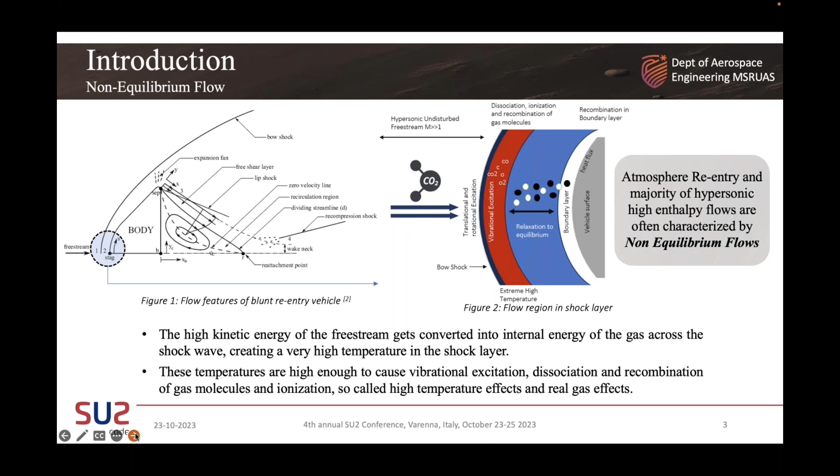At this condition, where we observe complex vibrational and chemical kinetics at the local region of the vehicle surface, one of the hardest parts is to accurately predict the surface parameters, specifically to compute the heat flux data across the surface of the body, since it plays

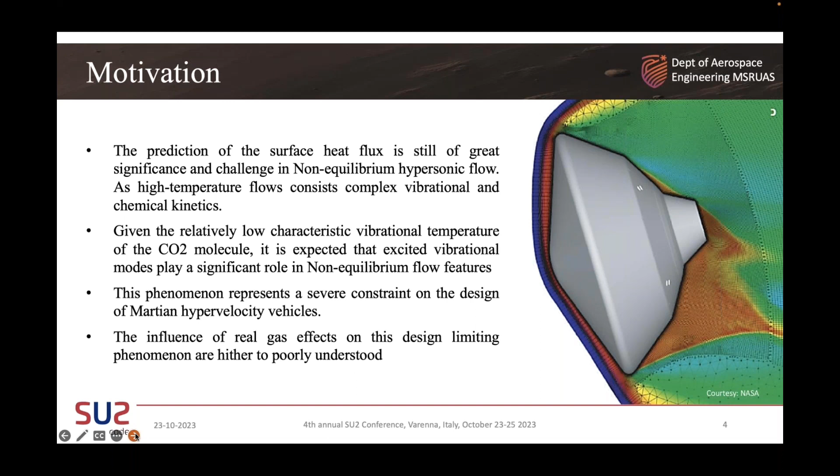a very important role in the design characteristics of Martian hypervelocity vehicles. On top of that, given that the low characteristic vibrational temperature of the CO2 molecule is expected to play a significant role in non-equilibrium flow features, the main aim and objectives of the current work are to model the aerothermodynamic environment and study the non-equilibrium effect on heat flux in CO2 dominated flows, to carry out validation of SU2-NEMO modeling capabilities for high enthalpy reacting flows against experimental data, to assess the augmentation of heat flux due to different thermochemical modeling assumptions, and finally to compare results from SU2-NEMO and the Fluent solver.

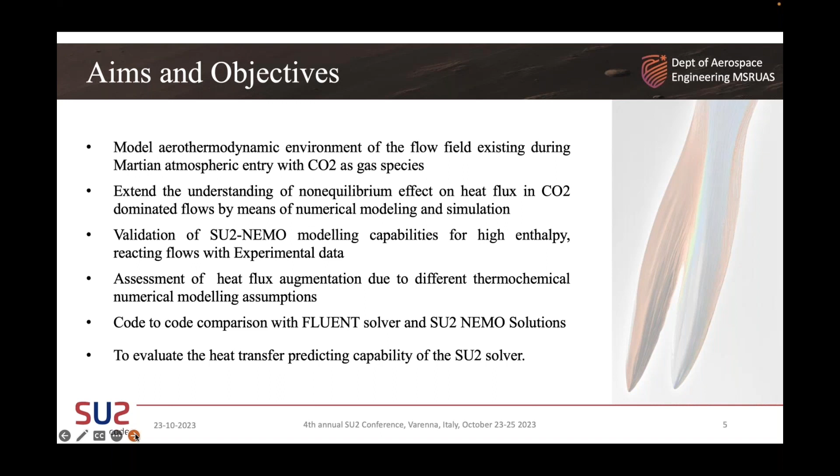For this current study, we have taken two different geometries of large angle blunt cone bodies: one having a 120 degree apex angle, another with a 60 degree apex angle blunt cone. These geometries are basically used as a forebody configuration for hypersonic re-entry vehicles. The 120 degree apex angle has a base radius of 50 mm and nose radius of 25 mm. The 60 degree apex angle has a base radius of 40 mm and nose radius of 35 mm.

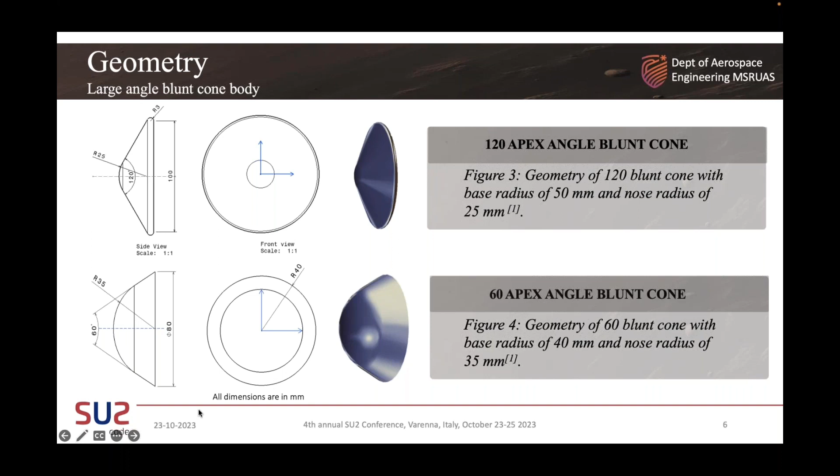These are the free stream conditions taken from the experimental paper carried out by Professor Mohammad Ibrahim, who is now working in IIT Kanpur. He carried out experiments in high enthalpy and low enthalpy flows using FPST, a free piston shock tunnel, in IISc. In this case, I have taken a high enthalpy case where the enthalpy is 3.6 megajoule with a Mach number of 5.87, pressure having 572 Pascal with the temperature 739.85.

The test gas used here is pure CO2 gases, and the table above shows the gas properties that were present in the nozzle supply region. These were the total pressures that were present in the nozzle supply region.

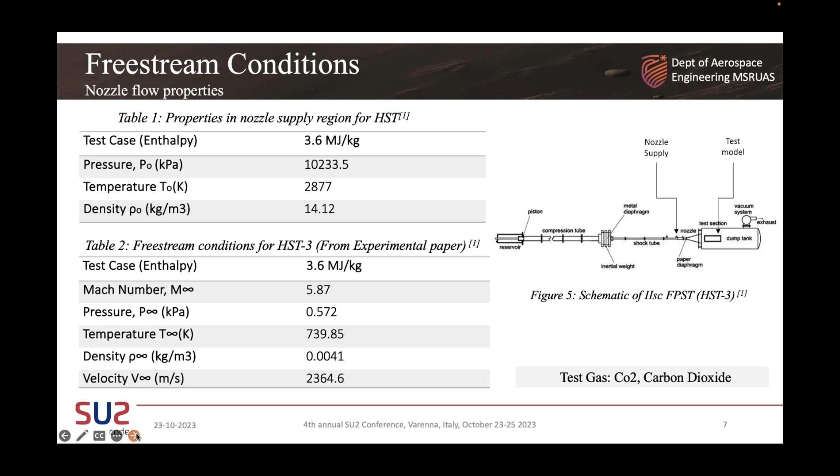Here we have the species mole fraction of different CO2 species that was predicted in the nozzle supply region using Chemkin software in the experimental data. All the reactions described here were taken out from the experimental paper, which was calculated by Chemkin software in the experiment.

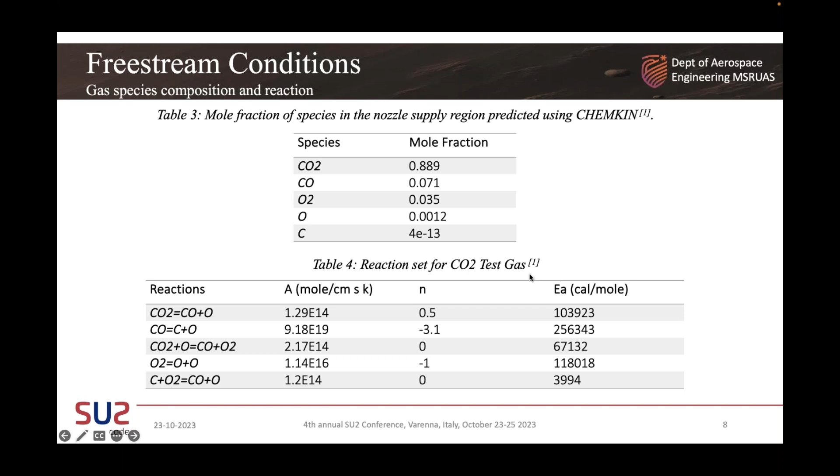Here is the whole implementation and workflow of how the solver works. The coupled system of SU2-NEMO and Mutation++, which is a thermochemical library, helps in computation of thermochemical and transport properties of the gas mixture.

Since we have a different chemical mixture and different reactions occurring, we have created a mixture file and reactions file. In the mixture file we add composition and species present in the free stream condition, and the reaction file contains all the reactions taking place between the molecules that are present.

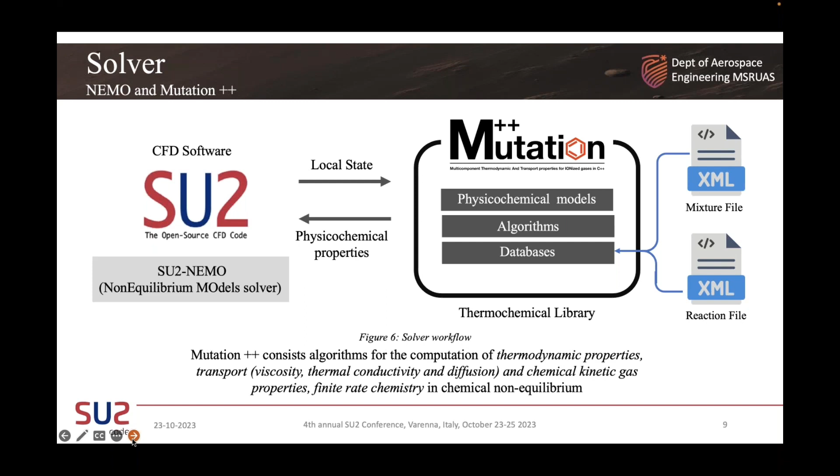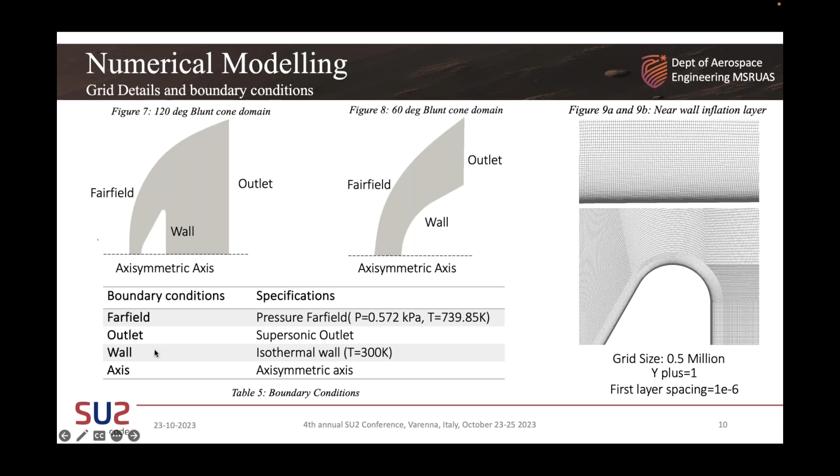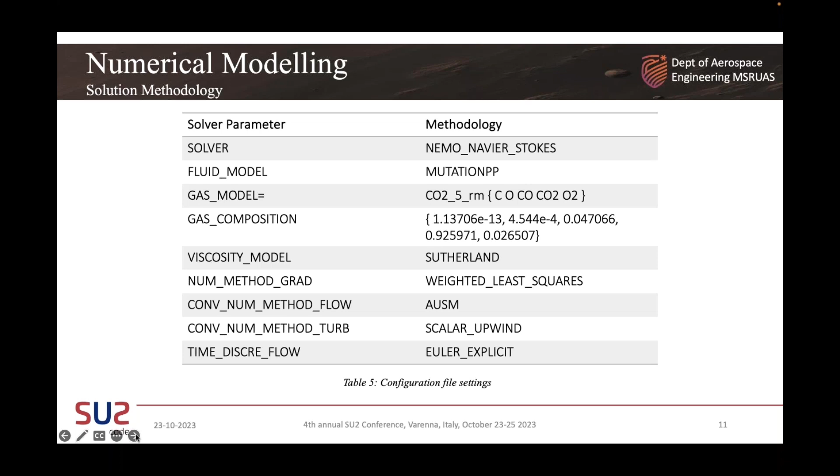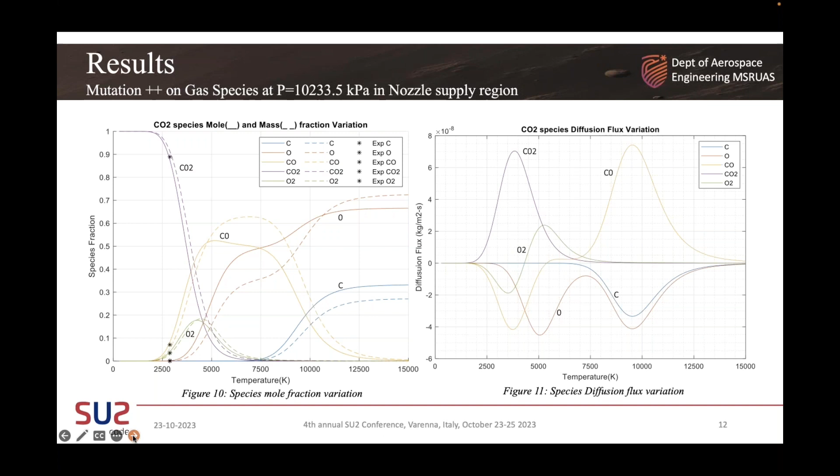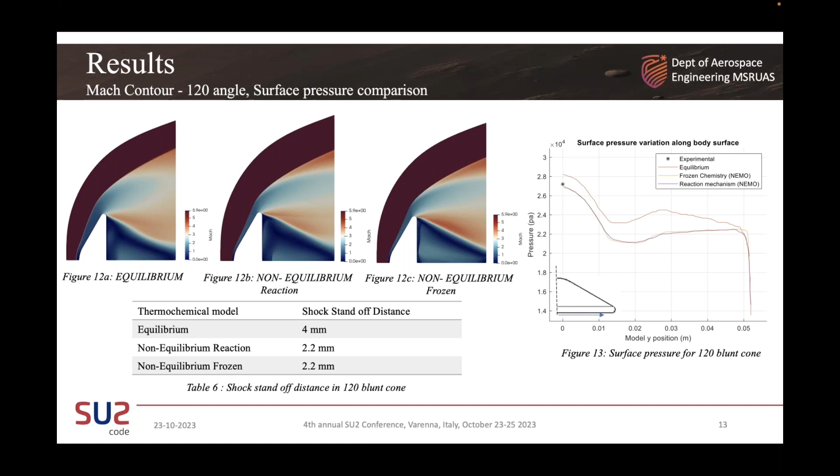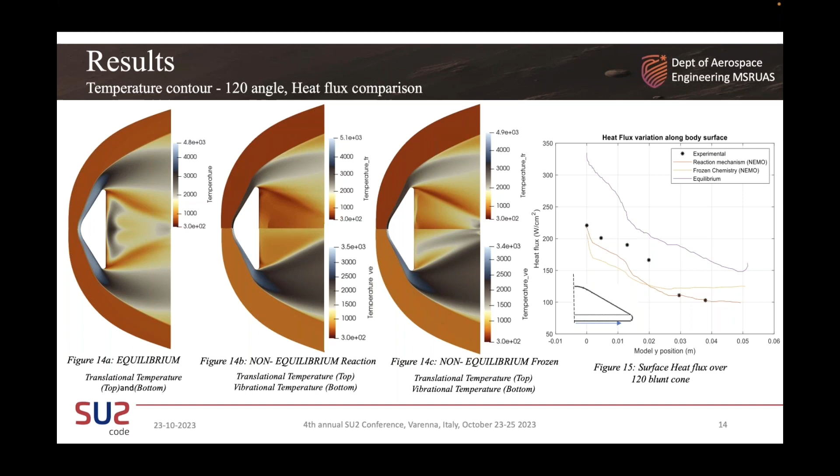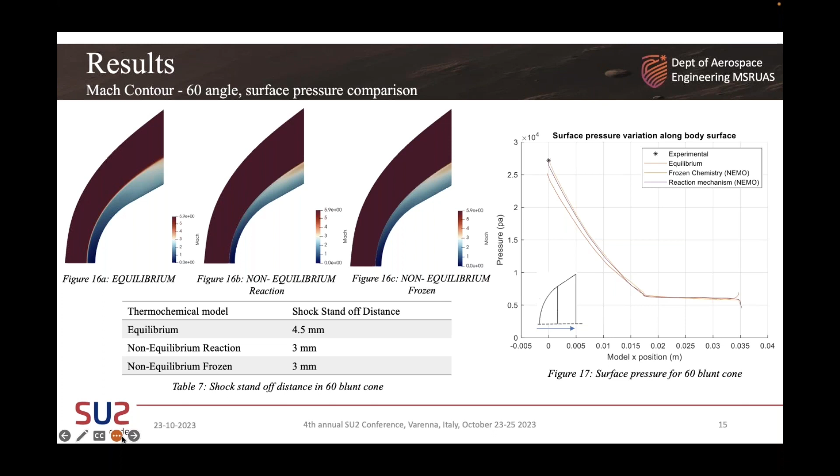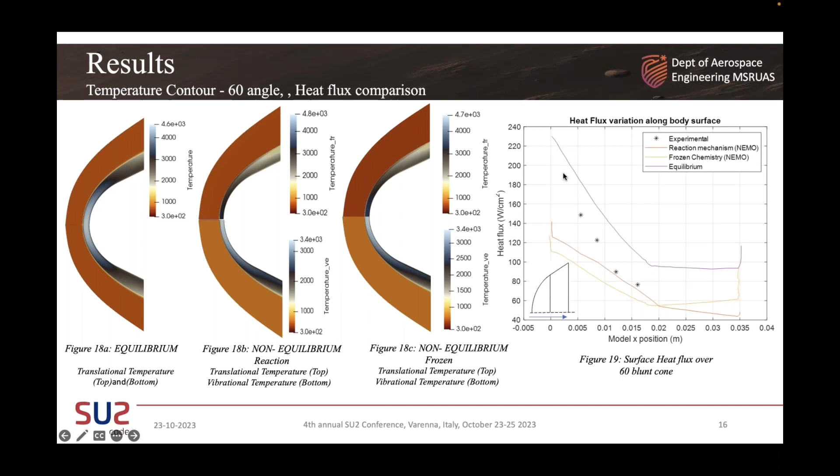So these are the same temperature contours, the vibration and translation rotation temperature contours for a 60-degree blunt cone. Again, in the 60-degree blunt cone, much deviation was found in the heat transfer near the stagnation region, but in the aft region the numerical results and the experimental data matched pretty well. It's not accurately matched, but it's closer to the experimental data, and obviously in the equilibrium case a higher error was found along the body surface.

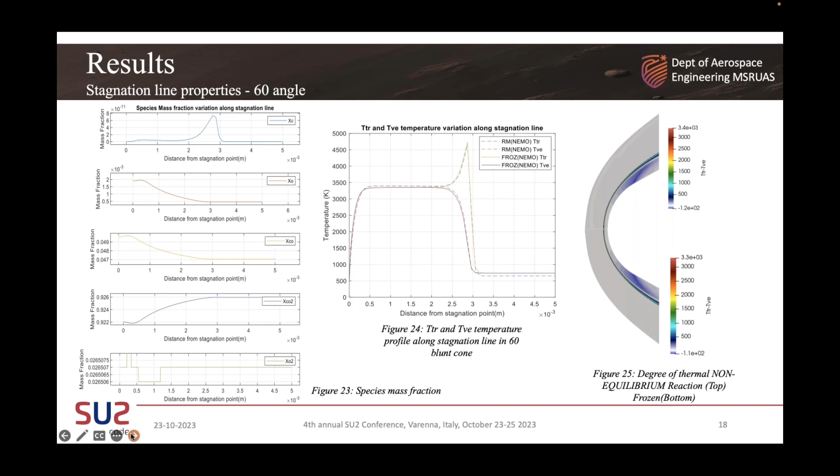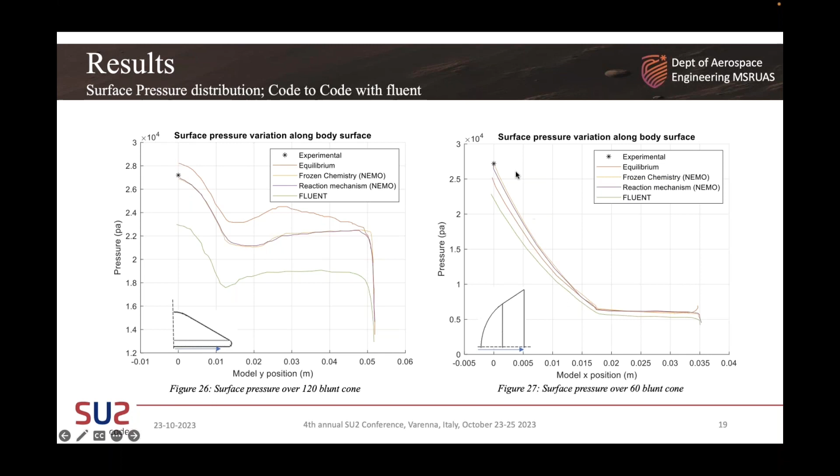So finally, we have carried out a code-to-code comparison with the Fluent data. Fluent data eventually under-predicted the surface pressure as well. But in the case of 60 degrees, all the pressure data for every different chemical model give similar results, except at the strongest region near the stagnation region.

So these are the heat flux comparisons, which were compared with Fluent. Fluent also provided almost constant heat flux near the nose region, and even the stagnation region for the 60-degree blunt cone was also over-predicted in this case.

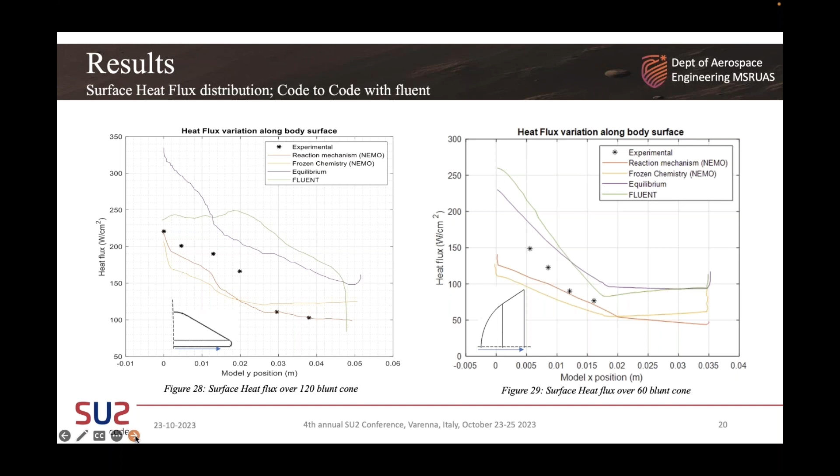So with the data we obtained using the simulation, we can conclude that heat flux analysis demonstrates a significant difference for equilibrium and non-equilibrium flows in thermochemistry assumptions.

Heat flux and pressure, especially for the equilibrium model, were over-predicted in most of the cases. The reaction mechanism and frozen model showed no significant change while predicting pressure, but exhibited some differences in predicting the heat flux.

And in the thermochemical model, a higher shock standoff distance was predicted than for non-equilibrium flows, and code-to-code comparison with Fluent showed that SU2-NEMO has better capability in predicting heat flux at non-equilibrium conditions.

And the state of population inversion, as I said earlier, in the apex angle of 60 degrees, was found near the conical region. So as a future scope of the current project, we are trying to implement a catalytic wall.

Since in the real world we don't have a perfect isothermal wall condition, we are trying to implement a catalytic wall. And since we don't have high HPC systems currently, we look forward to performing 3D simulations as well, and to compute radiative heat flux at higher temperatures.